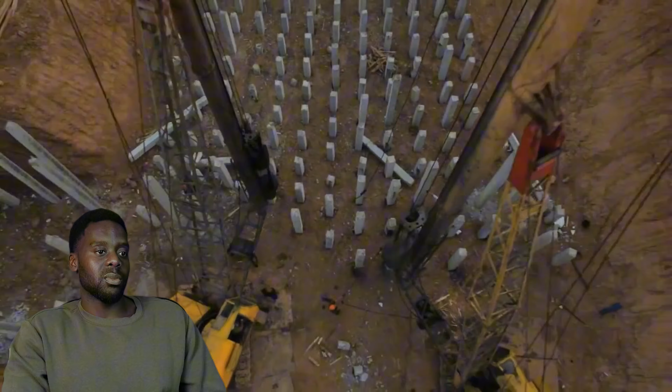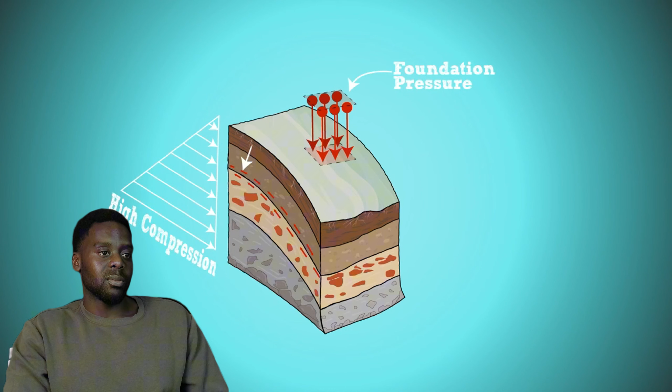However, before we dive into these geotechnical applications, first we need to understand some basic principles of soil mechanics. Soils, unlike other construction materials such as steel, timber, or concrete, are almost always under compression. But interestingly, soils never fail in compression. All practical soil failures are due to excessive shear stresses.

Shear stresses are less intuitive, so let's have a closer look at the shear capacity. Subsurface materials like soil and rocks are fundamentally different from other construction materials, so for simplicity, I'll just refer to them as soils from now on.

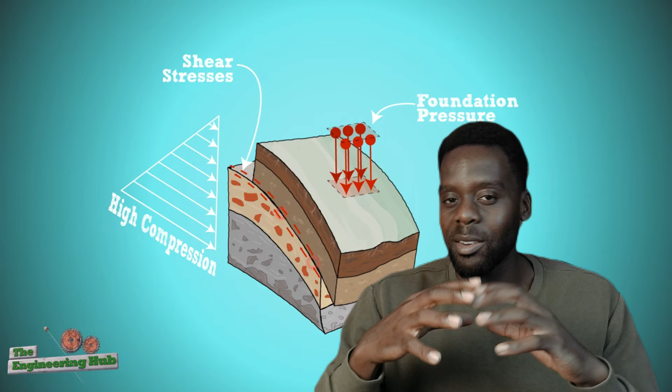Unlike steel, wood, concrete, or plastics, soils are made up of discrete elements - mineral particles, organic matter, water, and air voids. The interaction between these elements determines how soil behaves, making it a complex material to work with, which you will see later in the video.

The strength of common engineering materials, such as steel, timber, or concrete, is governed by the strength of their molecular bonds, and therefore is usually fairly high. Soil, on the other hand, is a discontinuous particulate material made up of various size particles. The interlocking of these particles is what gives the soil its resistance to shearing.

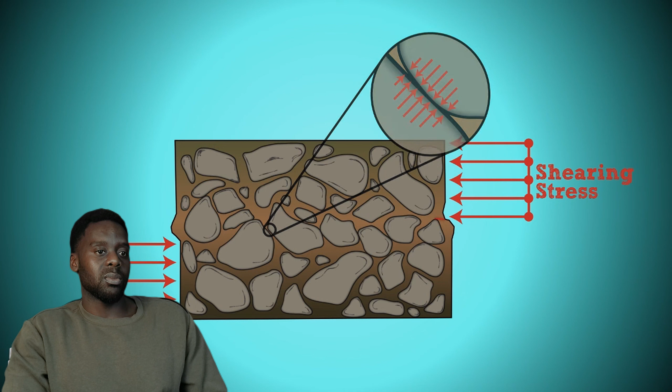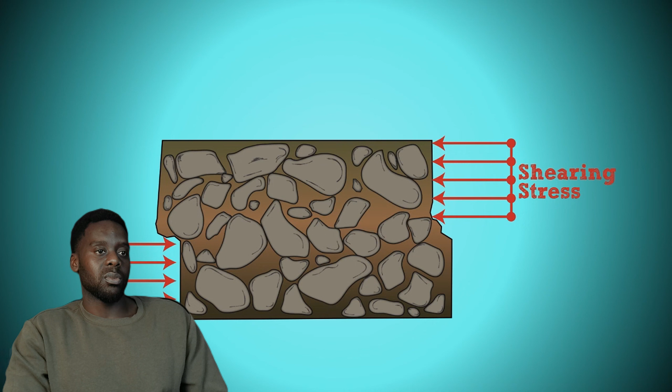When the shear stresses along a particular plane or slip surface are large enough to make the particles roll or slide past one another, failure is initiated. In the field, shear failures of a soil mass are usually confined to a narrow zone where rearrangement of the particles occurs. Without these interlocking forces, the material would behave more like a fluid rather than a solid.

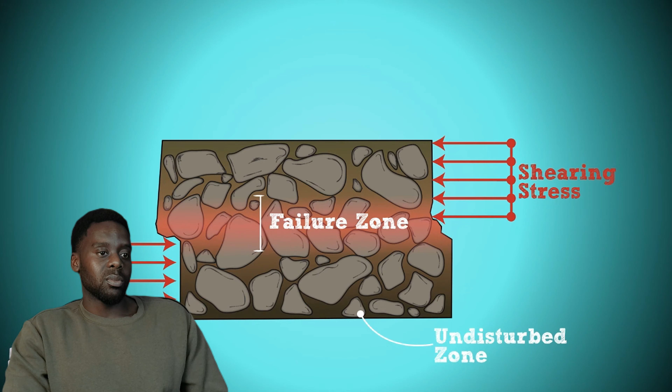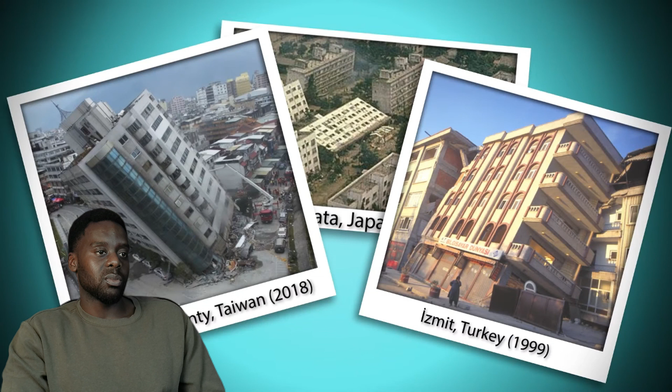This condition, where the soil turns into a fluid-like material, does happen sometimes and is known as liquefaction. But it is a specialized case, and we will not worry about it for now. Soil liquefaction is an interesting phenomenon. As explained in the video, the interlocking of soil particles governs the soil strength and the load-bearing capacity.

Soil liquefaction is a unique type of failure that mainly affects granular soils like sands and gravels, especially in earthquake-prone areas. Let's say you have a structure built on saturated sand, meaning that the spaces between the soil particles are filled with water.

When an earthquake strikes, ground vibrations cause soil particles to shift and try to compress the void spaces. Since water is incompressible, it tries to escape, but because this happens too quickly for drainage to occur, pore water pressure suddenly increases, putting all the soil particles in suspension. This reduces shear strength to almost zero, meaning there is no more solid particle interaction, so the ground will behave like a liquid.

As you can see in these photos, the buildings collapse, but notice they are still structurally intact. Besides the interlocking or frictional strength, soils also possess cohesive shear strength.

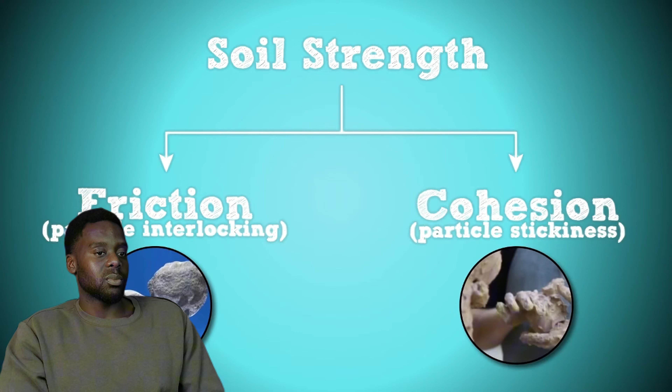Cohesion, in practical terms, represents the stickiness of the soil, such as in clays, but is usually zero for coarse-grained soils like sands and gravels.

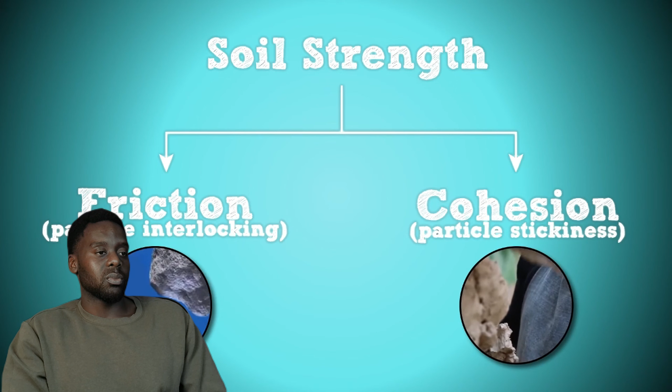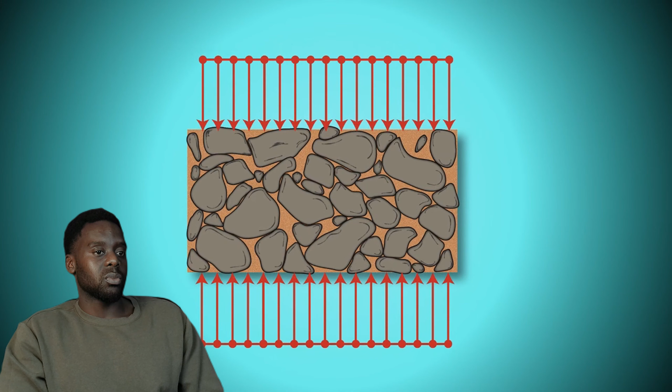What makes things complicated is the fact that the frictional strength of the soil is dependent on the pressure the soil is under. This makes intuitive sense, since if the soil is compressed, the particles get further interlocked and sliding becomes more difficult. On the other hand, submerging the soil underwater has the opposite effect, since the buoyant force from the water helps the particles become partially afloat.

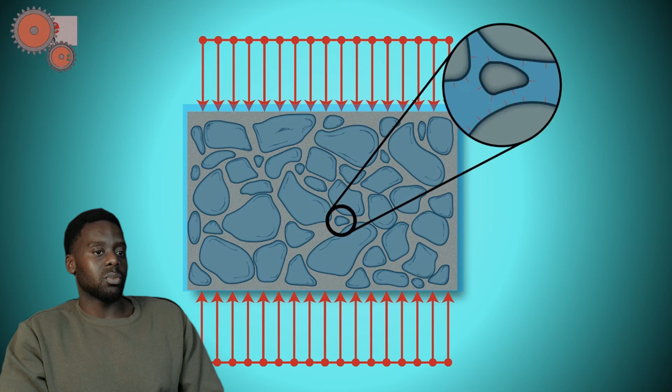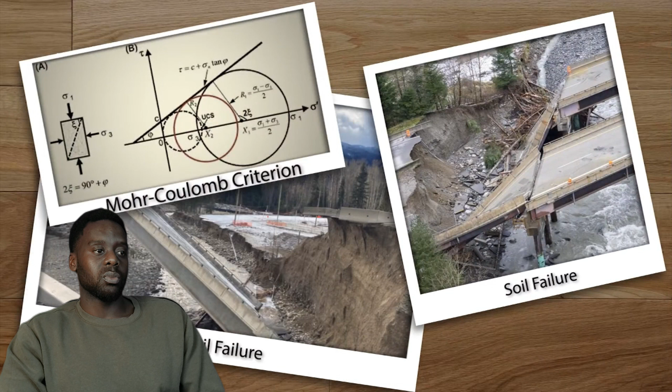In more technical terms, the pressure from the water reduces the friction resistance of the material. In practice, the strength of soils is represented by the Mohr-Coulomb failure criterion. The German engineer Otto Mohr graphically represented the strength of the soil as a line on a graph.

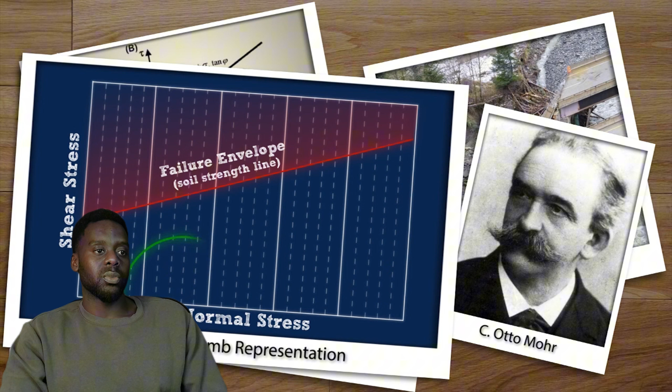With the material's normal stress plotted on the x-axis and the shear stresses on the y-axis. When the soil is loaded, it forms a semicircle on this plot that is known as the Mohr circle. The two ends of the circle represent the normal stresses that the soil is subjected to.

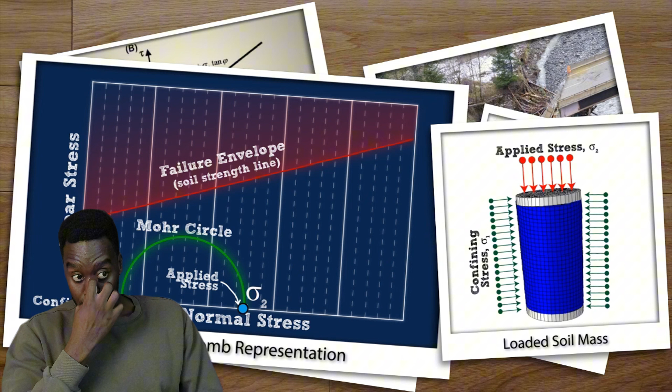An alternative way to look at these stresses is as a confining stress on the low side and an applied stress on the high side. These stresses are also known as the principal stresses of the material. Notice that to keep the circle small and away from touching the failure envelope, we need to increase the confining stress together with the applied stress. In theory, if the soil is well confined, its carrying capacity can be increased indefinitely.

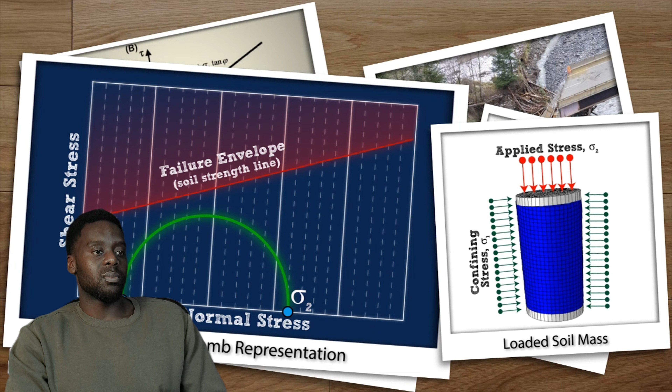Note that every point in the soil mass draws a separate circle on the graph. As the soil continues to get loaded, the circles grow until one or more of them touch the failure line. The point in the soil mass whose Mohr circle touches the failure line first is where the sliding in the soil will occur. This usually happens simultaneously for a whole plane in the material, which initiates a sliding failure.

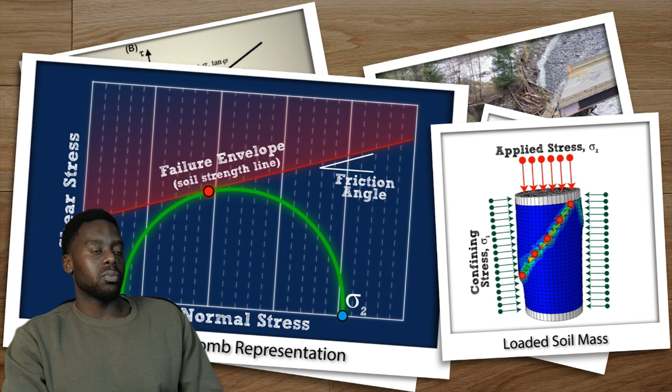The slope of the failure line is represented by a parameter called the friction angle, which is the single most important strength parameter for a coarse-grained soil. If the friction angle is high, then the soil can resist higher shear stresses.

Now we're getting into the meat and potatoes of this video. Two of the most important soil parameters in foundation design, retaining wall construction, and slope stability analysis are the internal friction angle and the undrained shear strength. They are derived in a similar way but function differently, as I will later explain in the video.

So for granular soils like sand and gravel, they gain strength from friction between particles along the shear zone and from the confining pressure. On the other hand, cohesive soils like clay and silt rely more on the electrochemical bonds between the particles, what is called particle cohesion.

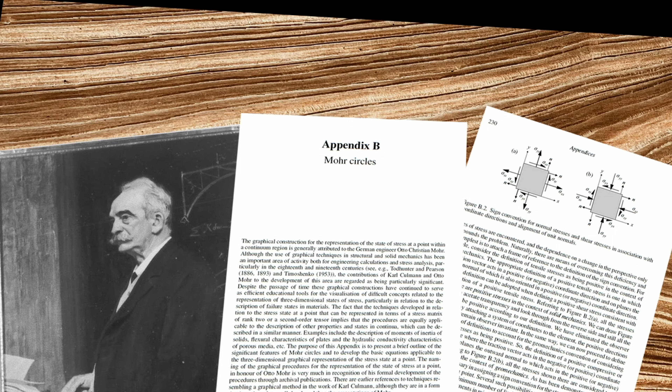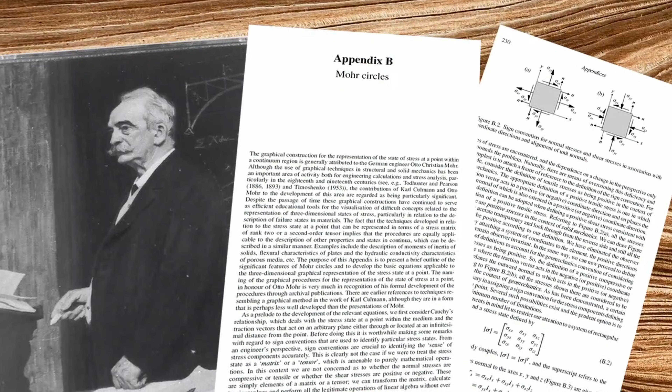To understand these concepts a little bit better, let's take a closer look at Mohr circles. Back in the late 1800s, Otto Christian Mohr, a German civil engineer, expanded an earlier graphical method for stress representation, and this eventually got developed into a technique we use today. His work was further refined in the early 20th century by Karl Terzaghi, who is regarded as the father of soil mechanics. This Mohr circle has revolutionized geotechnical engineering and remains a critical tool for understanding stress states and predicting soil behavior under different stress conditions.

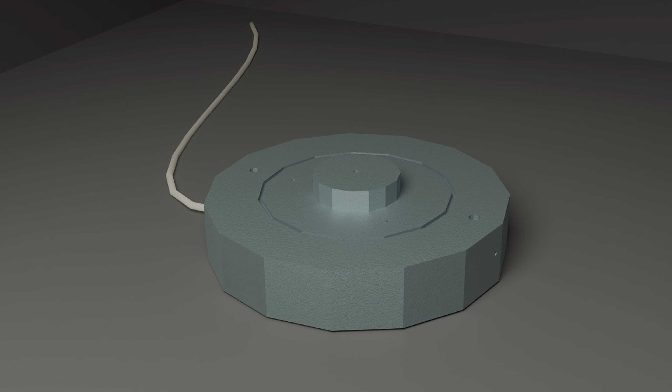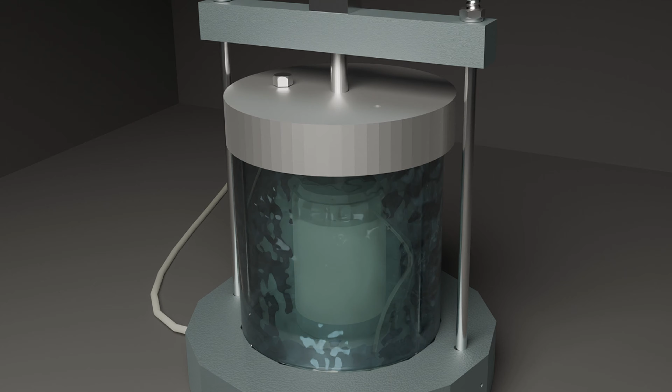One of the most widely used methods for determining soil strength parameters is something we call a triaxial shear test. A soil sample is enclosed in a rubber membrane inside a triaxial chamber. Water pressure surrounding the sample is used to simulate the ground confining pressure. For sand samples, increased pressure allows water to drain, increasing particle contact and therefore increasing the shear strength.

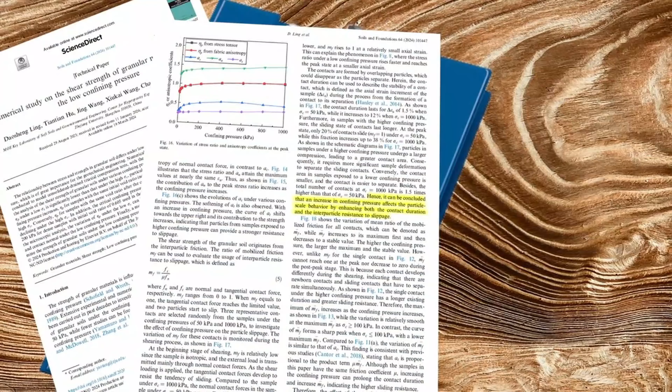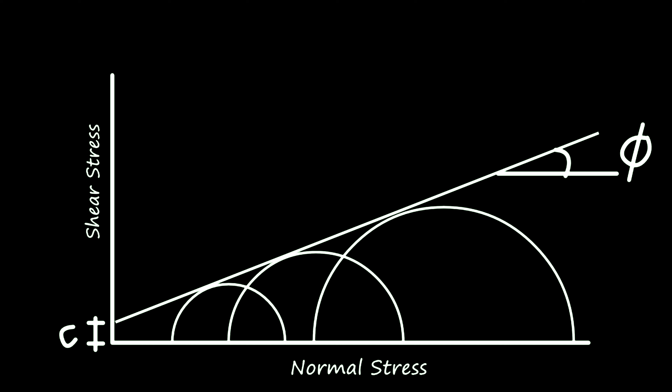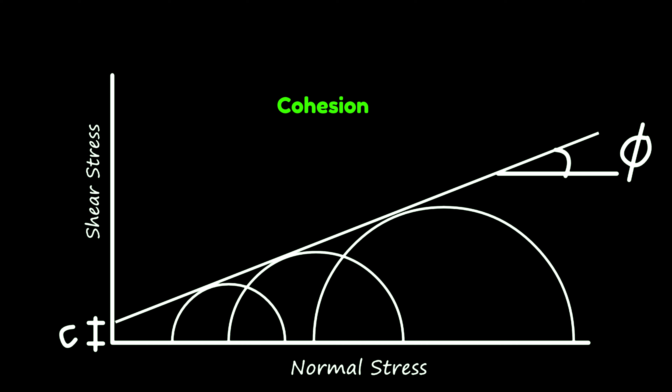These tests are repeated at different confining pressures, and different Mohr circles are plotted. You will notice that the higher the confining stress, the larger the Mohr circles. If we plot a tangent line to all the circles, forming what we call a failure envelope, its slope represents the friction angle and its y-intercept represents cohesion. But mostly in granular soils, the cohesion is considered negligible.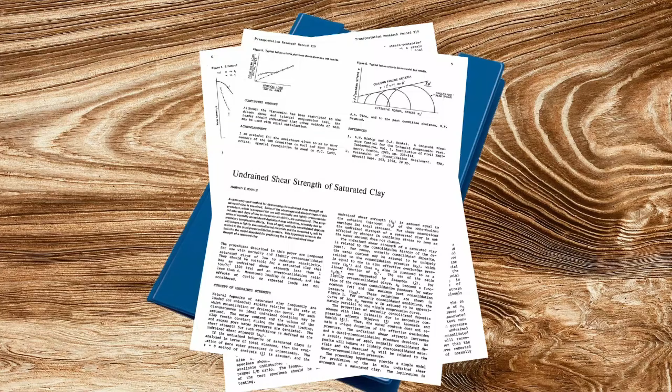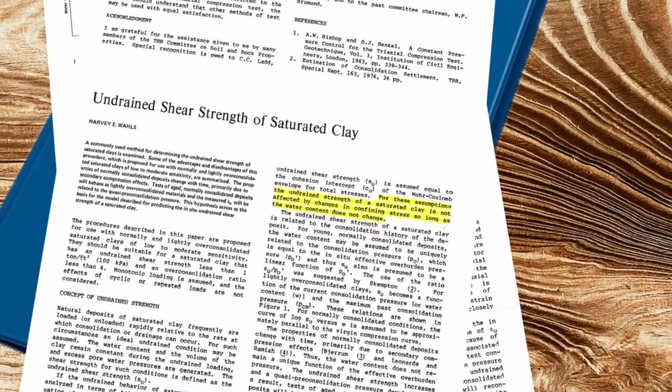On the other hand, cohesive soils like clay and silt behave differently from granular soils due to their low permeability and strong interparticle cohesion. When subjected to confining pressure, cohesive soils do not allow rapid drainage, meaning that pore water pressure remains trapped within the soil matrix. This influences the way stress is distributed and how failure occurs.

Unlike granular soils, where increased pressure leads to drainage and enhanced particle contact, cohesive soils retain water, preventing significant changes in their internal structure. As a result, when shear stress is applied, the Mohr circles remain roughly the same size across different confining pressures. This is because the soil does not develop additional frictional resistance from particle rearrangement.

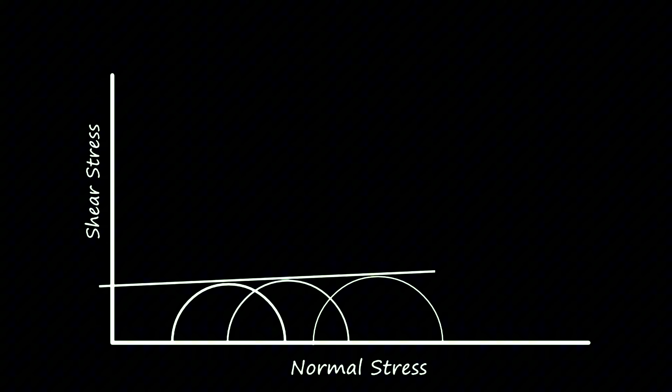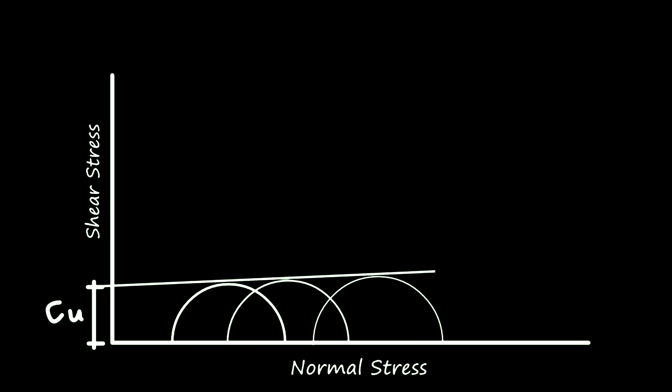The failure envelope for cohesive soils is typically horizontal, meaning that cohesion is the dominant strength parameter rather than frictional resistance. This is known as the undrained shear strength, which is crucial for short-term stability analysis, especially in excavations, embankments, and foundation loading. Over time, however, as the pore water pressure dissipates, cohesive soils, the clays and silts, transition to a drained condition where effective stress now takes over and governs their behavior.

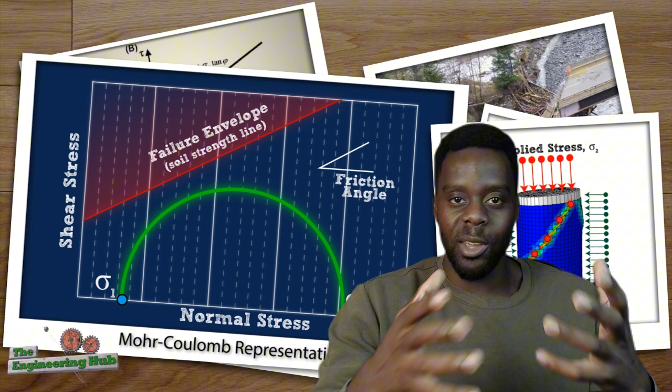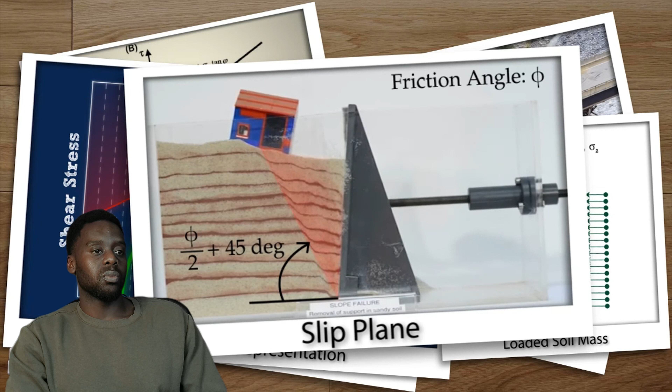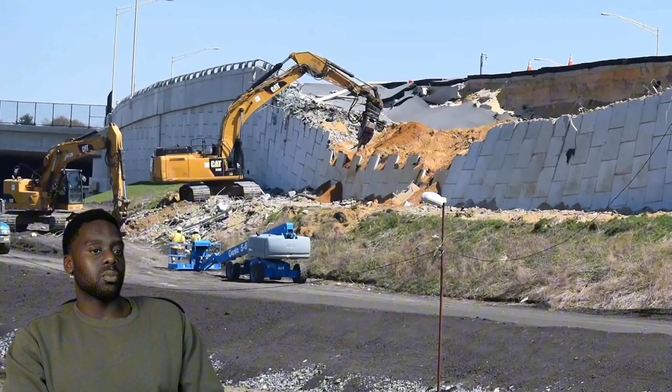The most important takeaway from here is that the parameter called the friction angle is what determines the strength of a soil. The friction angle of a soil is influenced by the soil type, shape of particles, groundwater condition, and void ratio, among other things.

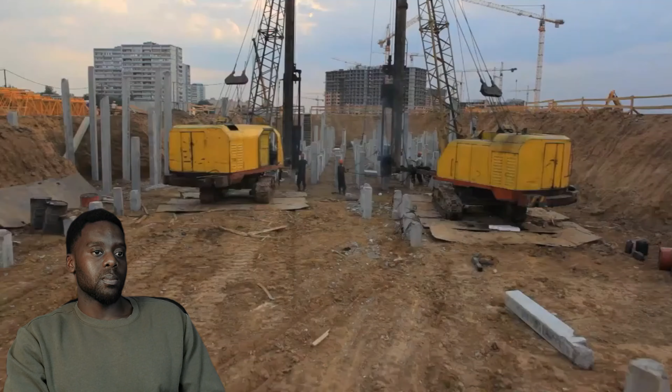So angular, well-graded, compacted soils exhibit high friction angles and make up the best type of soil to be used as backfill or to build a foundation on. Stay tuned for the upcoming videos where we will be discussing geotechnical applications such as retaining walls and foundations.